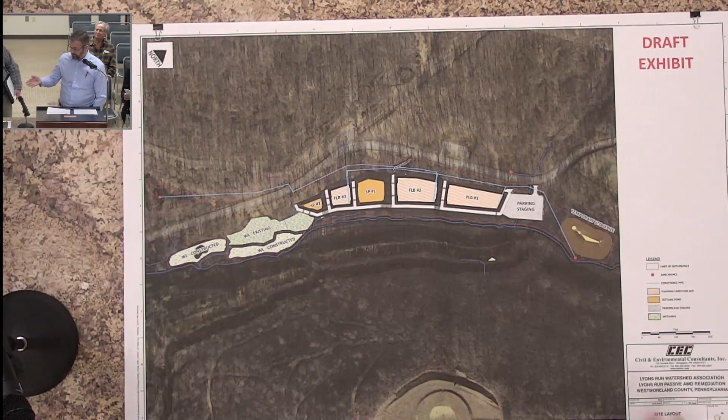My name is Timothy Denicola, D-E-N-I-C-O-L-A. I work with Civil and Environmental Consultants as well. What I can do is, using this exhibit, give a quick rundown of how this passive AMD treatment system operates.

The Lyons Run watershed is impacted by acid, iron, and aluminum-rich water emanating from the Irwin Coal and Gas number 2 mine along Boxcar Town Road. Active mining ceased likely sometime in the 40s or 50s based on aerial imagery. There are collapsed portals into the mine entry, which are identified as problem areas by the Office of Surface Mining, Reclamation, and Enforcement. The problem area designation actually makes the site eligible for funding, and puts it on the radar of these federal and state agencies as a target for restoration.

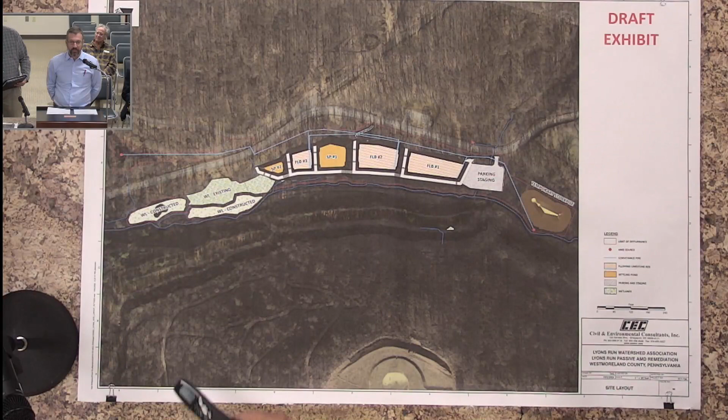There are 3 mine water discharges emanating from collapsed portals on the site, represented by red dots on this exhibit. We call these L4, L5, and L upwelling. They've been identified through over a decade of watershed research as being the major contributors of contaminant to the Lyons Run watershed. What the Watershed Association is proposing is to capture the 3 mine water discharges and convey them via a 12-inch SDR 35 sewer-type plumbing system into a series of alkaline-generating limestone beds and settling ponds.

So what we have here, I'm going to basically run through this site from higher to lower elevation. It's a gravity-driven passive site, and that's why they're referred to as passive. Once constructed, they do require some maintenance, but it's minimal compared to more active treatment approaches, which include automated treatment plants.

From the upper reach, this is the parking staging area, which is going to be the main site access coming in off of Boxcar Town Road. The mine water itself will be conveyed to either Flushing Limestone Bed 1, Flushing Limestone Bed 2, or Flushing Limestone Bed 3. The limestone beds generate alkalinity.

They neutralize the acid. Once the acid's neutralized, the metals that are dissolved in the water, iron and aluminum, can no longer remain dissolved, so they precipitate in the limestone beds. Allowing precipitation with no flushing or method to clean those solids over time reduces the effectiveness of the system. So for close to 20 to 25 years, the flushing bed has been an accepted approach of mine water remediation. Periodically, on a weekly to monthly cycle, these beds would flush through subsurface plumbing.

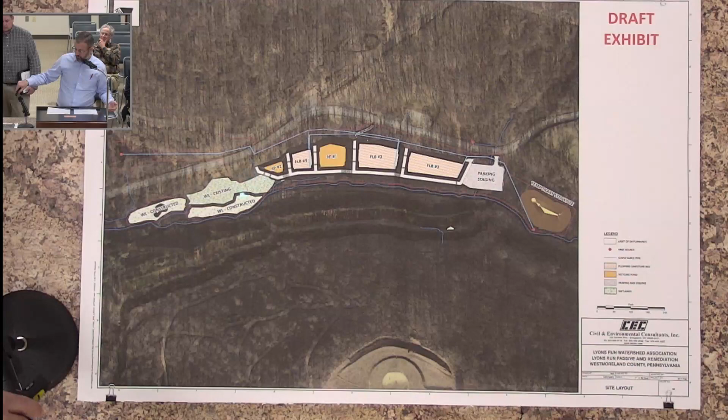After running through a series of existing and constructed wetlands, the treated water, now fully and completely treated alkaline mine water, discharges back into this unnamed tributary to Lyons Run, and then down to the Lyons Run main stem. Lyons Run currently has very low ecological scores and poor water quality for close to 4 miles. By the 6-mile mark, it's returned to a functional, healthy ecological system. Our intention is to facilitate that same uplift on the upper 4 miles closer to the mine water treatment system.

Okay, and if there are any questions, I'd be happy to answer them.

I have a question. At what level of acid in that water does it hit a mark that's bad, and where is this one at? Like, where are we starting?

So the acid concentration in this water is about 250 milligrams per liter. Mine water acidity could range from 50 or 100 up to about 1,000. But when you're getting up into the 900 to 1,000 range, it's typically best to implement automated mine water treatment processes using treatment plants, chemical reagent, mixing basins, clarifiers, and running 3-phase power into the site. At 250, it's starting to climb above your base levels of 50 to 100, but it's still within an acceptable margin to treat passively, especially on a site that utilizes such a large footprint.

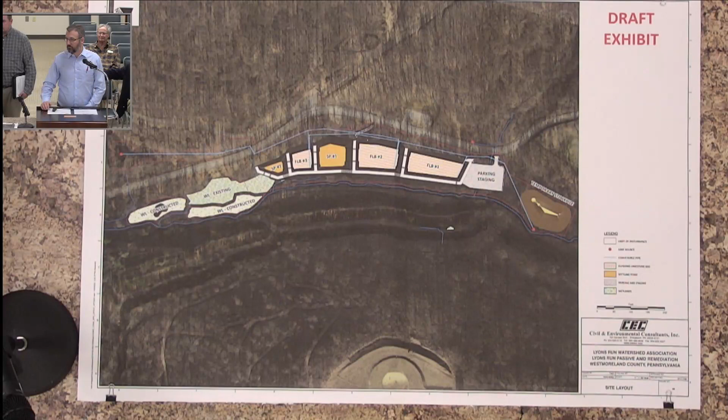Are these tax parcels—some in Penn Township, some on Boxcar Town Road—private tax parcels, or any of them municipal property? Who owns those? The bulk of the treatment system is located on property owned by Lyons Run Watershed Association. They purchased approximately 8 acres a few years ago. There are some conveyances on private land, and the polishing wetlands are on private land, but all of those accesses have landowner contracts or right of entry agreements to allow construction and long-term operations and maintenance.

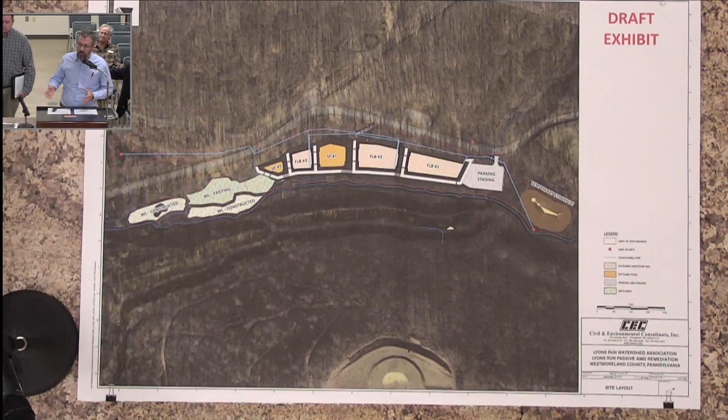Is there any kind of security for the facility? There's not traditional security beyond potentially fencing. We've put fencing in as a line item cost in the construction estimate, but these are low targets for vandalism. There are hundreds of them across Appalachia, and there's no history I'm familiar with of any extreme acts of vandalism or injury associated with them.

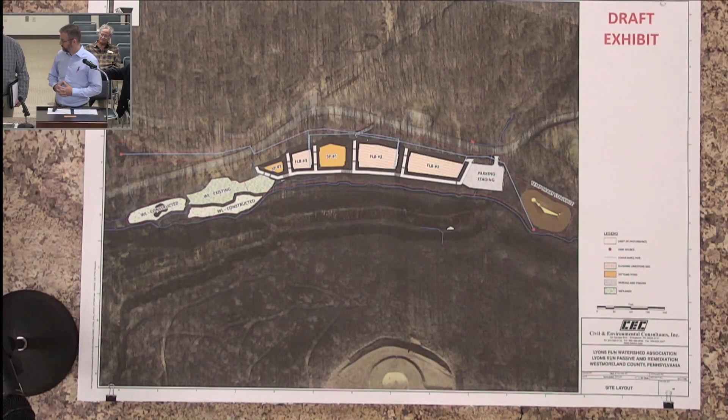Any other questions or concerns from council? Hearing none, thank you. At this time, I ask, is there any public comment in regards to the acid mine treatment system specifically? Seeing no public comment, if there's nothing further from council, I'd ask for a motion to close the record. I'll make a motion to close the record for the Lyons Run acid treatment system. Thank you, Jason and Tony. All those in favor, please say aye. Aye. Record is closed. Thank you.

Mr. Nestico, correct me if I'm wrong, we don't need a stenographic record for the next presentation, right? No, we do not. Okay, wonderful. Thank you, ma'am. That brings us to our next item, which is a Franklin Township Municipal Sanitary Authority semi-annual consent decree progress report by Mr. Jim Rumbaugh.

Thank you very much, and thank goodness we're not having a stenographic record of this. First, I want to thank the council, and Mr. Morrison and Mr. Nestico for inviting me here to make a brief presentation. I'd like to go on a bit about where we were when we started a while ago, because maybe a lot of the residents don't know, and maybe some people on council aren't familiar. A bit of where we are today, and a bit of where we're going in the future. If at any time you want to stop me and ask questions, that would be wonderful. With me this evening is the manager of the Franklin Township Municipal Sanitary Authority, Nicholas Kerr. He works for RDM—I'll get into that in a minute—but he's here to answer any questions I can't. You might also ask your council president, because he's our liaison who attends the meetings, or Georgie, she's there all the time too.

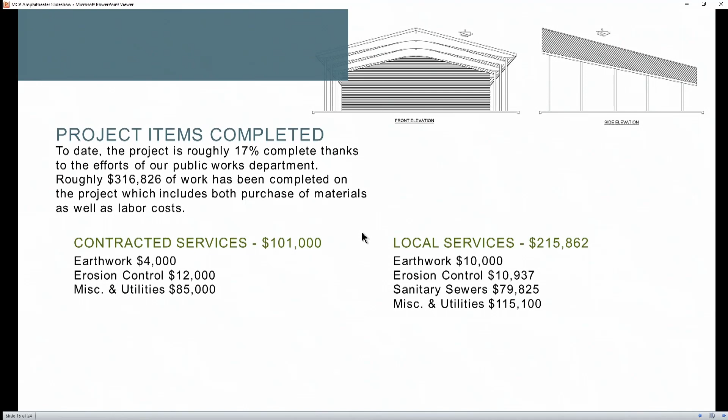There are additional opportunities to offset some of our costs. This is not all-inclusive, but as I mentioned, the restroom grant application that was submitted would help offset some of those costs, along with using reserve funds set aside. There are also opportunities through federal infrastructure funds or even PA small water and sewer grants that we may be able to obtain to help offset costs for the remaining work.

There's even been thought of maybe incorporating some sort of solar arrays on the buildings themselves. We're going to look into that. There's certainly no guarantee, and that may not fit into the project itself. But at this point, we're trying to identify sources of funding that the state is offering, pushing, or promoting.

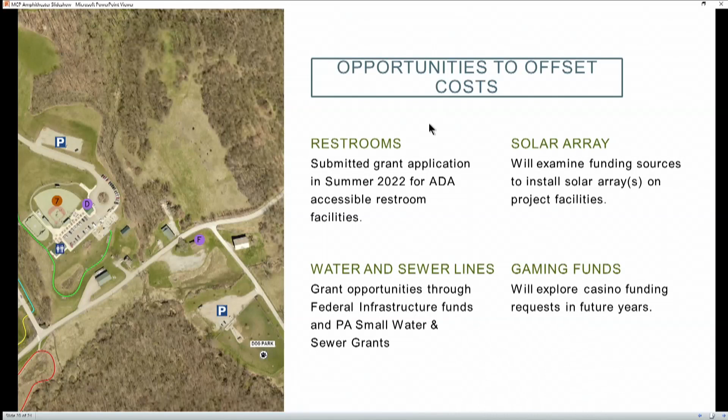And then maybe we can jump on that in conjunction with this project. Lastly, if you saw the article in the newspaper, I believe yesterday or today, about gaming funds being distributed to local municipalities, we will probably look next year to try to tap into some of those funds, whether for this project or something else in the municipality. Any way to obtain funding helps offset costs overall, and that's the goal we try to achieve. So those are some of the ways we're going to look to offset costs. No guarantees with any of those yet, but we're trying to explore all options as we move through the project.

Just a brief timeline. This may not be completely accurate, but as you can see, things started to kick into gear here this year in 2022, and that's when Public Works was able to get some of the work done at the project. We also applied for funding and did cost studies earlier in the year. Later this month, after they round out a few projects they're currently working on, the plan is to get back over to the site to continue working on some of the utilities.

Carrying into next year, in late winter, early spring, they're going to round out some of the utility work with the water lines and storm systems. A rough timeline would have us continuing to make progress throughout the summer with completion toward the end of the year. I think that's a little bit unrealistic at this time, but using the template slideshow I had here, I wanted to fill it out as best I could.

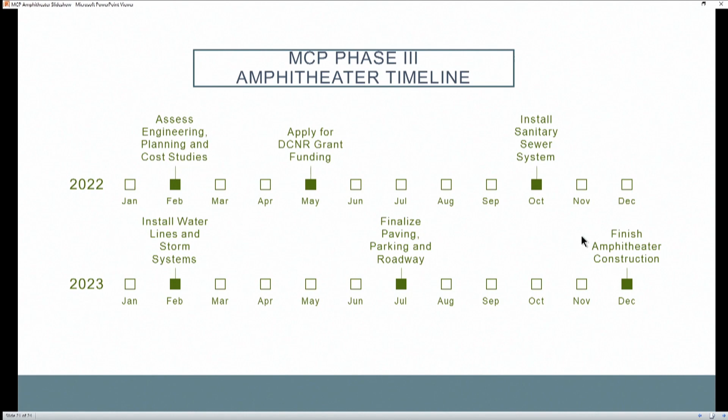I don't know what would take place here in December of '23. It's more likely that the amphitheater, if it were to fully round itself out, probably wouldn't finalize until '24, but hopefully early '24 to be able to start bringing in some of the different acts and usage of the facility at that time. So this is maybe a little bit hopeful, but we can certainly strive toward that. A lot of it is dependent on the funding and when it's available.

Lastly, as part of this project, it's important to keep in mind that it falls in line with the Westmoreland County Comprehensive Plan that was recently completed, Reimagining Our Westmoreland. The different bullet points in that plan include cultivating arts and entertainment, being a welcoming community, embracing diversity and inclusivity, as well as making parks welcoming and accessible. So it checks a lot of the boxes in the county's plan.

Obviously, being a big community in Westmoreland County, it would be a big project for us to complete and execute upon. I think it would meet the goals of the county's overall plan.

Lastly, as part of the study or survey that was sent out, there are some other aspects of the project that could be completed along the way in a phase 4 or beyond. Some of those include potentially incorporating a snow tubing area, which the community responded to in the survey a couple years ago, as well as trails and picnic areas. There are some flat areas above the seating area pictured on this slide, so we may be able to incorporate small picnic areas, picnic groves, and trails that would go up into those areas.

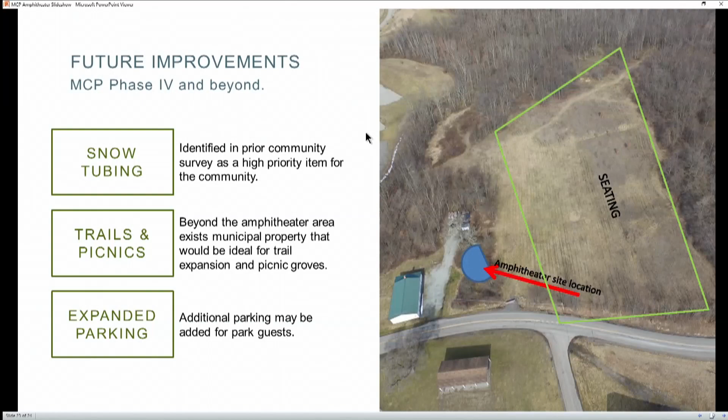And then expanded parking for the overall park itself. This would provide some parking on this portion of the park, but also it may proceed up toward the playground and splash pad area and the Miracle Field area, providing a little bit more parking for the park itself, as well as adding maybe another exit to the park, depending on how we gate the structure itself.

So that's pretty much all. I tried to go through that as quickly and efficiently as possible since we're on the 4th presentation of the evening, but certainly open to answering any questions. Mr. Morris and Mr. Payano will also be able to help answer any outstanding questions from council.

Okay, council? You really put that together well. Yeah, great plan. Appreciate that, and also Bill for the work from your crew. I have a question. Sure.

Is there an estimated maintenance or recurring cost with a facility like this? I don't know of one offhand. There certainly will be ongoing maintenance. Coming from a community that had an amphitheater, it wasn't too substantial—rather routine, minor repairs, things like that. It would depend upon the level of installation. If we were to install sound or electrical equipment, stereo systems, those require more ongoing maintenance; they get weathered. But as I understand it, this project consists more of just the shell of the amphitheater itself, allowing different bands or users to bring their own equipment. If that's the case, there probably wouldn't be too much ongoing maintenance, not much more than other aspects of the park.

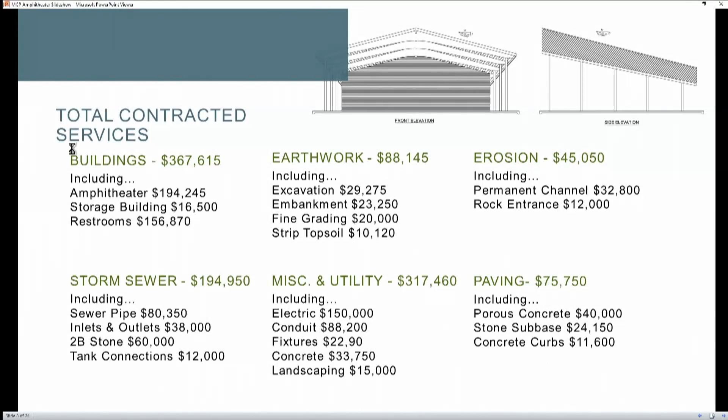This road will continue to that, so an offshoot of this area will be parking. That'll be done before this area is developed. Sorry, I'm trying to find a good one to help here, but I think we get the idea.

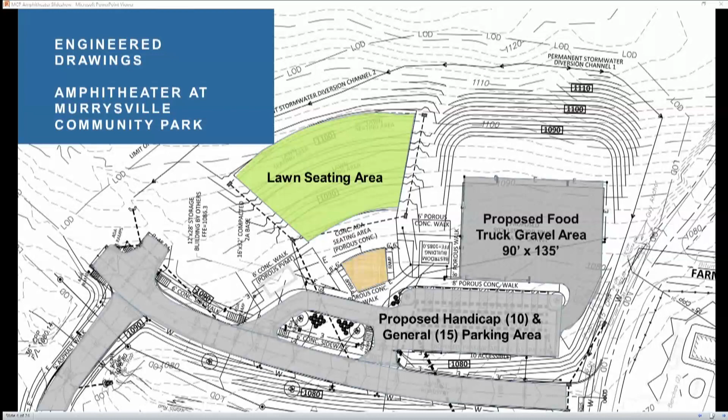Are there any other questions? That would be a good time to try to help answer them. Great put together on this. This is really great, very helpful.

Thank you, very nice. I think the next question is, do we prepare the specifications and move forward, Council? Let's say it this way, are there any objections to moving forward? I'd like more time to consider. Okay, maybe then we'll digest the information and have an agenda item at the next meeting for further discussion on this. Is that all right?

Okay, do that, thank you. No, thank you, Mr. Nesco, and again that was a really great presentation. I can tell time went into this, so thank you. That brings us to our council action items.

We will begin with 13A. Can I have a motion, please? I'd like to make a motion to consider authorization to advertise ordinance number 1063-22, an ordinance vacating an unopened portion of a 40-foot right-of-way situated along Route 22 between contiguous parcels bearing tax map numbers 49-14-02-0-001 and 49-14-03-0-125 in the municipality of Murrysville. Second.